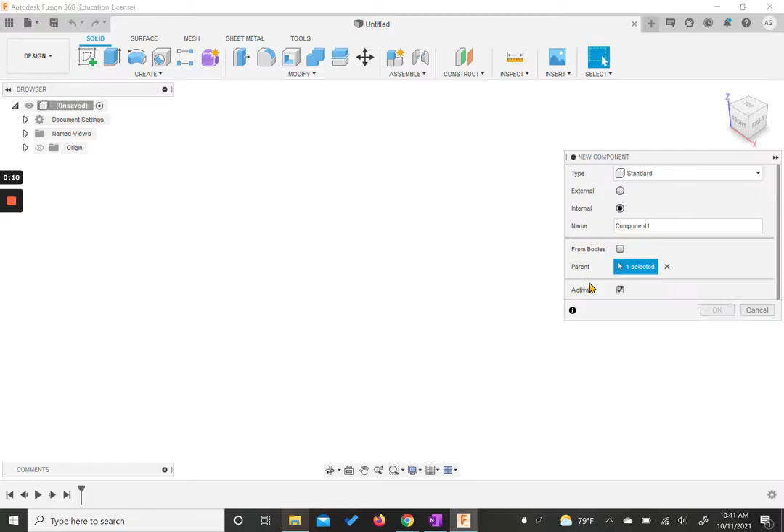First we're going to come and hit create and create our new component for this shape. We'll hit OK, then start a new sketch, and I'm going to start mine on our XY plane, this top plane, just so that it makes it easier for us to see what we're going to do next.

I do actually need to make this into inches for this shape. So remember, we need to come to our document settings, open the little folder, hover over it with your cursor, and hit change active units, choose inches and hit OK.

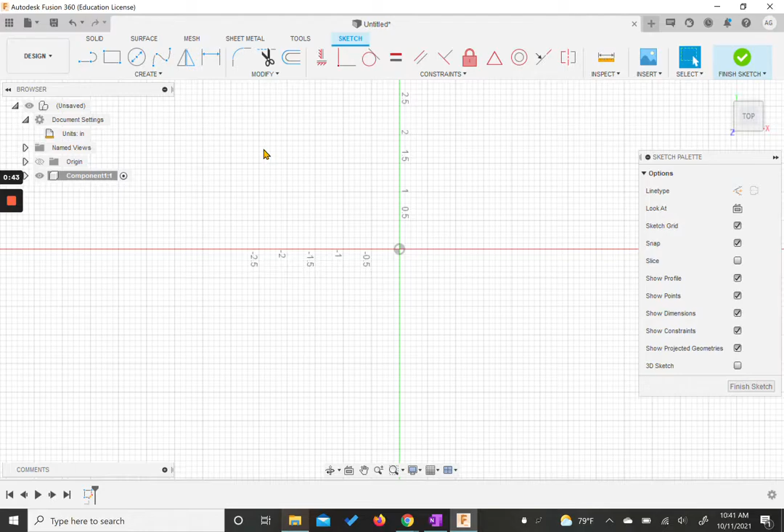Now in this sketch, we're going to create a circle. We're going to start it at the origin, right at the middle, and this is going to be 4 inches. So I'm just going to type 4 and hit enter. That's it for this sketch, so we're going to hit finish sketch over on the corner here.

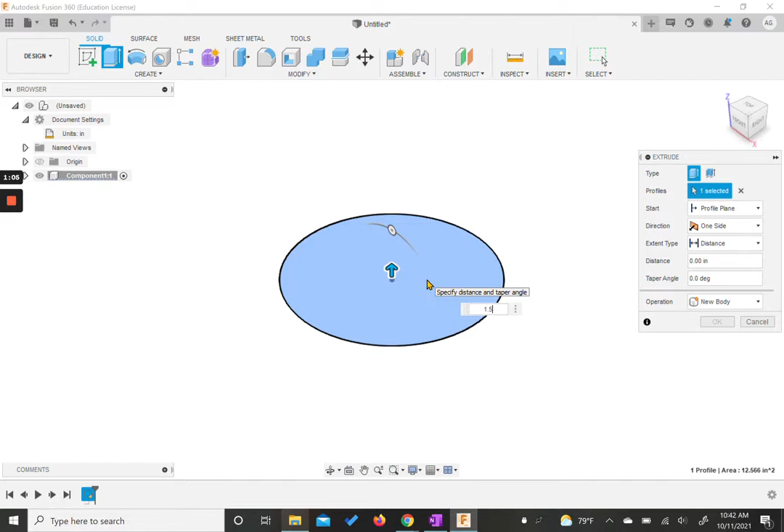We're going to extrude this to make a disc that is 1.5 inches tall. When you extrude it to 1.5 inches tall, we get this little disc. We're going to need to make a new sketch on this top surface.

So we're going to actually learn 2 tools today. What I'm going to do first, I'm going to go to the create panel, open it up, and choose the point tool. This creates a dot. So directly above our origin, I'm just going to click, and draw a point.

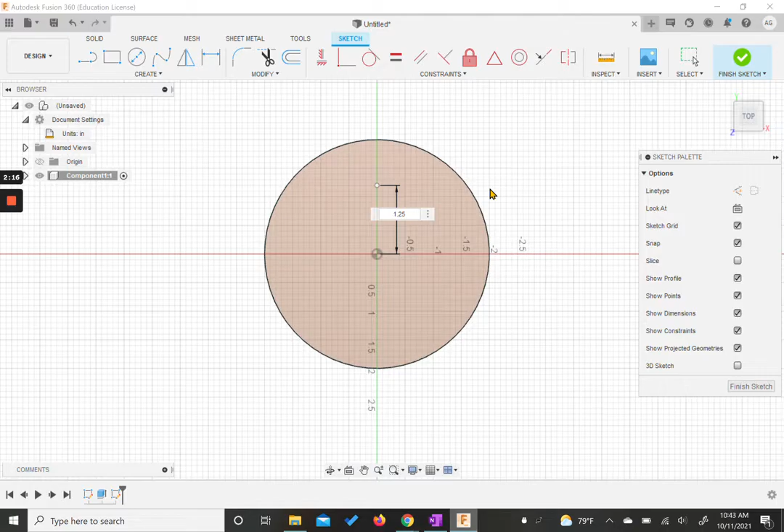I want to dimension this, so I'm going to hit the dimension tool, click the point, then click the center of our circle, and click to drop the measurement down. This is going to be 1.25, and I'm going to hit enter.

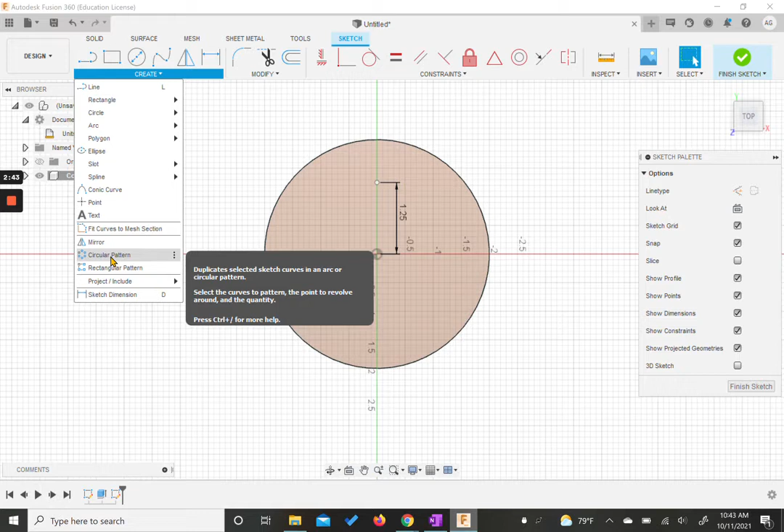But what would be a lot easier would be to come to the create panel and click this circular pattern. When you hit circle pattern, we can choose the object. The object is what you want more of, so we click on the dot. There it goes for the object.

And for our center point, we select that cursor, and that's going to be the middle of our circle. It's going to bring open this new panel that asks for the quantity. You can use the little arrows if you want, or you can type 5. So we need 5 here.

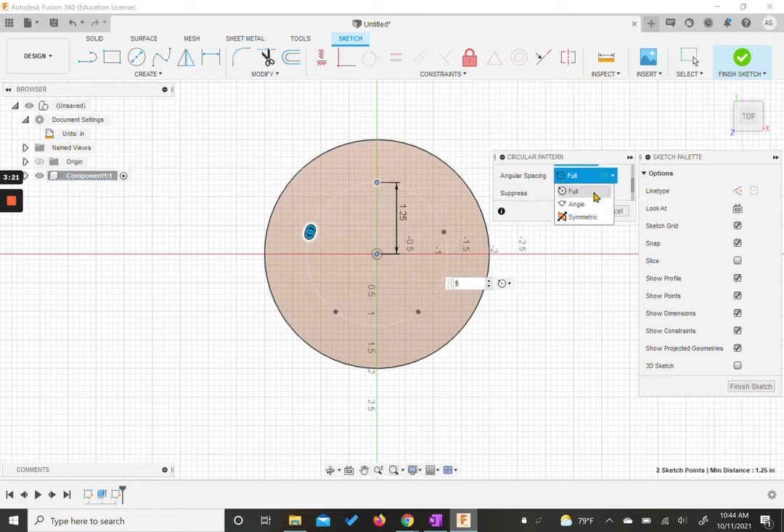If you wanted to change how far around it was going to go, we can change how many from that little arrow there, and we can also change the spacing if you wanted to. But for right now, we just need 5. We hit OK, and we now have 5 little dots. So we're going to finish our sketch.

Now we're going to start making holes with our hole tool. If you come up to our create panel here, there's the hole tool at the top usually. We're going to choose the hole tool. It asks to choose a sketch point, so I'm going to click on one of the first points that we have here. But now we need to know what type of hole we're going to do.

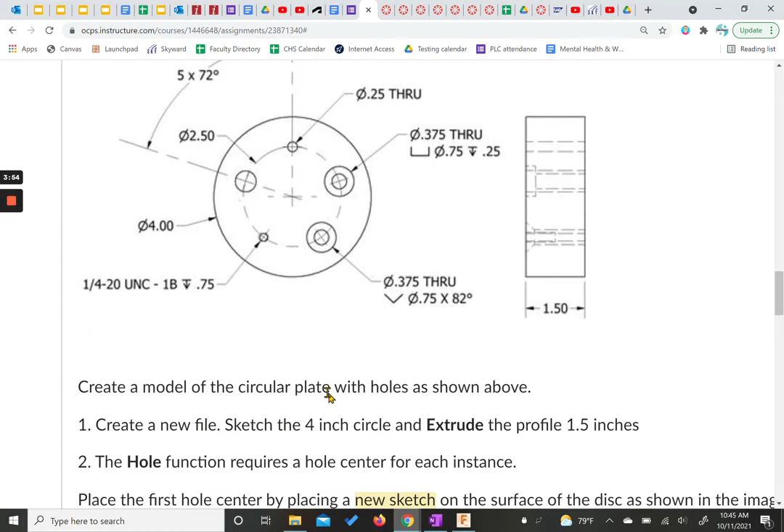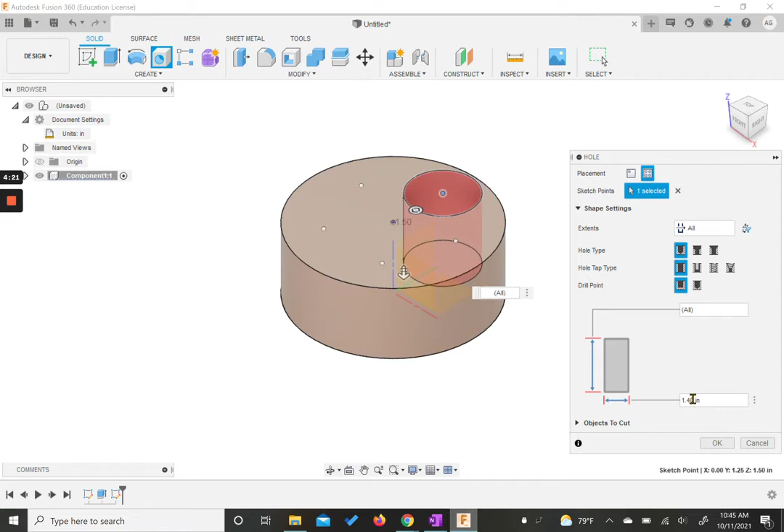If we come to our activity page, we have menus down here that show what your menu should look like. So we've chosen a hole, and we have these 3 chosen here. It's going to be a through hole, and it's going to be 0.25 inch diameter. So we're checking here - it needs to change from distance to through all. We have a flat point, and this is going to be 0.25 inch diameter. So that we can check, looks like this.

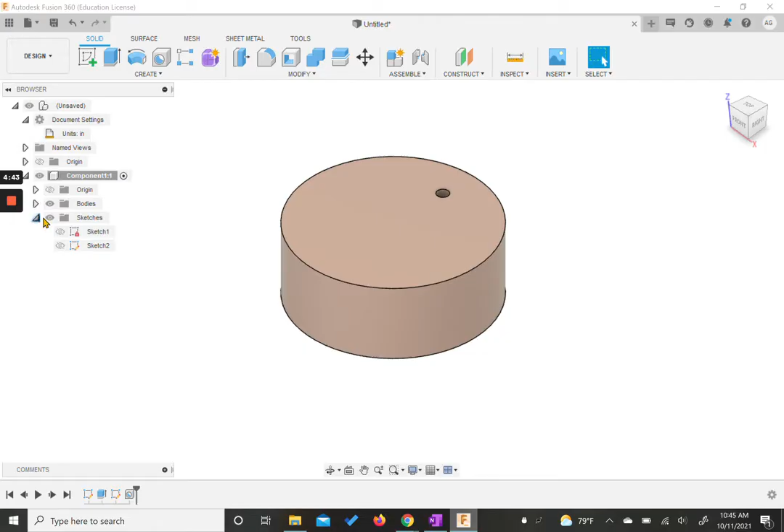All right, we can hit OK. And if you notice, our sketch disappears. So we need to come over here and open our arrow for component, open our arrow for sketches, and then we can toggle visibility for our sketch by clicking the eyeball icon.

So now we can still see our points. We're going to click the hole tool again, click on the next dot, and look at our guidance. We have a counter bore that's through all. We still have the same two left over here. In our values, we have our counter bore diameter of 0.75, our depth of 0.25, and our overall inner diameter of 0.375. So I come over here, we choose all, we choose counter bore.

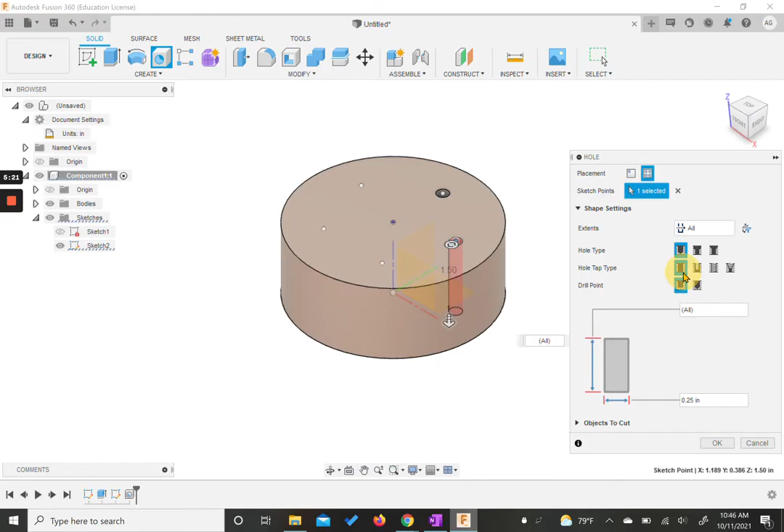If you hover your cursor over it, it'll name it for you so you can see them. We're going to come here, and this was 0.75. This was 0.25. And this one was 0.375. So again, we're going through and just matching the values in the fields here to what you have here. And we hit OK.

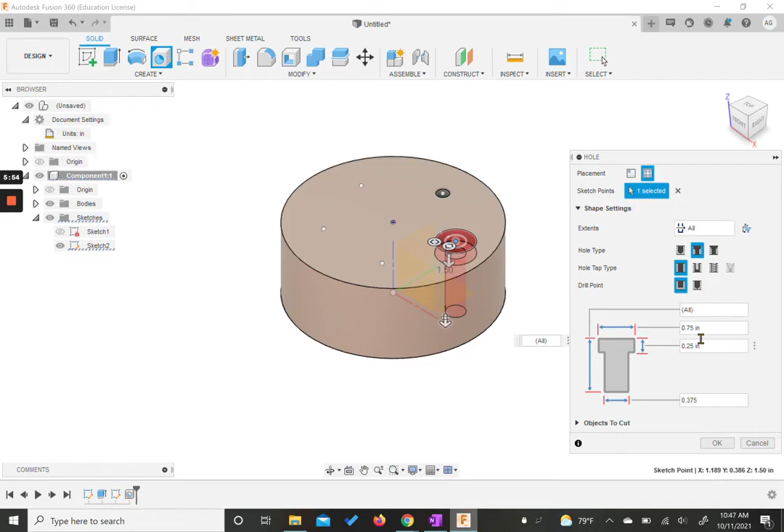Now this one looks just like that. Now if we scroll down, we have the next one, a countersink. That's the last one in this first option. So we have all, countersink, and then we have our values: 0.75, 82, 0.375. So we'll come here.

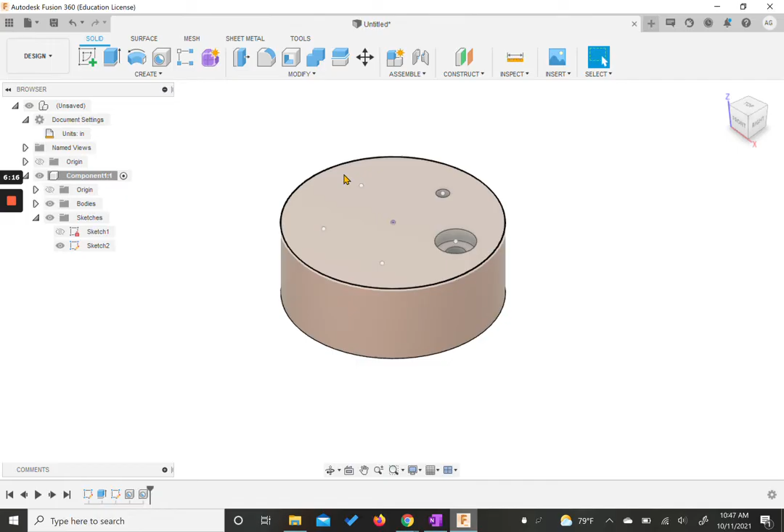Notice our dot stayed this time since we already changed visibility. We hit the hole tool, we choose our dot, we come over here and choose all, we choose countersink, and then we change our values. So this top one will be 0.75. We had 82 degrees, and then 0.375 at the bottom. And so this one's done.

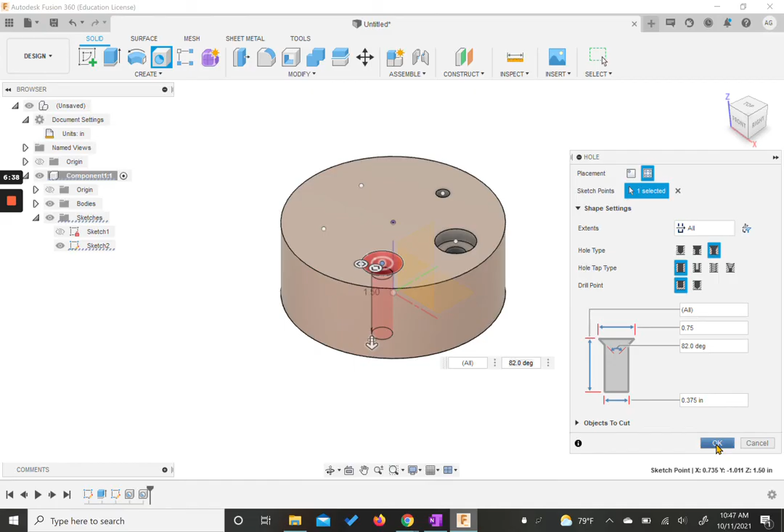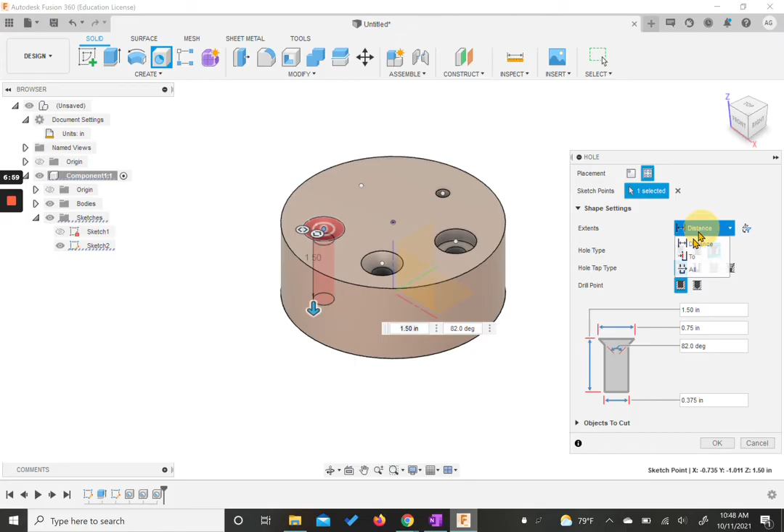We hit OK. Now we just have two more. If we go back, we have a tapped hole. So here we have all, we have the first option, we have the third option, so tapped. We'll keep the first two, and then we have a couple things to do down here. If we come over here, we hit our hole tool, we choose our dot, we come back to all, our simple, this first option, our third, which is tapped.

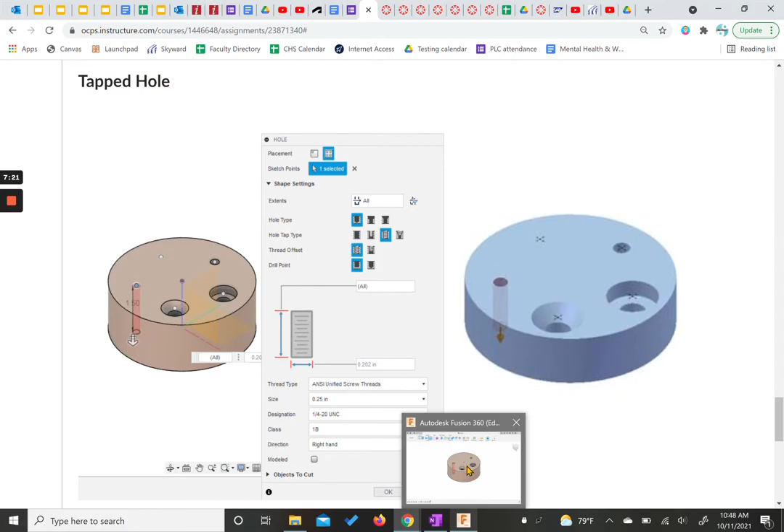And now this is where we need to double check the rest of this menu. If we come back to see what it should look like, it says ANSI unified screw threads, 0.25, 1/4-20 UNC. So that's the thread identification. We have ANSI unified screw threads, that's good. We need to open this and put 0.25. And then it should change.

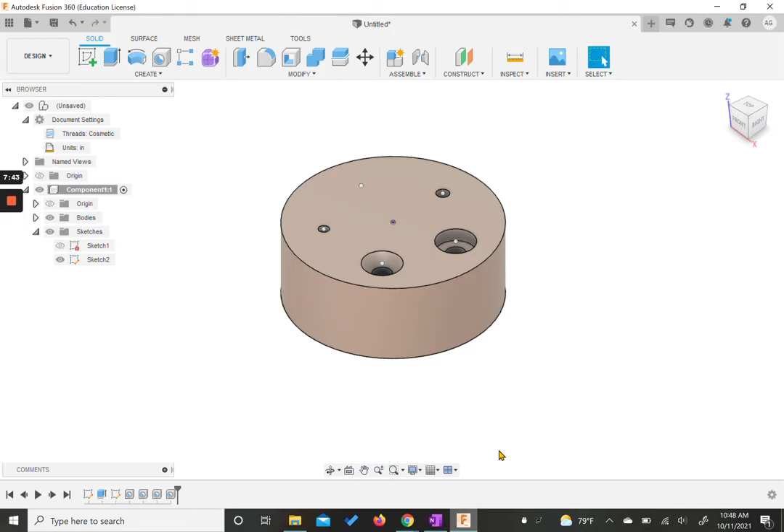Default is 1/4-20 UNC. Okay, this should be 2B right hand. We can double check, it says 2B right hand. So we're good to hit OK. This one has little threads, if you can see.

All right, and our last one, we have our clearance hole. If we come into here, we'll see our final one. We have our first, it's a simple. We have the second option, which is clearance. And then we have to change what it asks for in the menu. I've deleted or drawn out what's the measurement here, since that's added based on what you put in the menu.

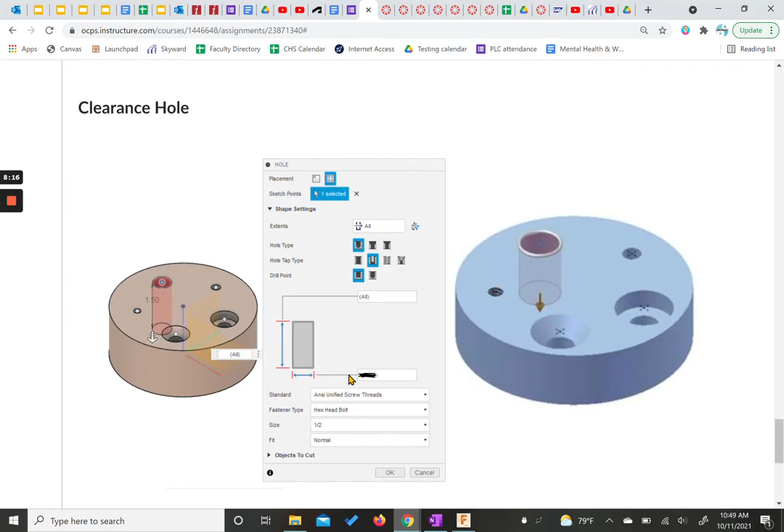Okay, so we come back to Fusion. We choose hole, we choose our last point. We come back to our menu, we choose all because we want it to go through the whole thing. We have simple, we choose our clearance, the second one. We come down here, again we're not paying attention to the number. We need to make sure these four things match what we have for our main menu: ANSI unified screw threads, hex head bolt, 1/2 inch, normal.

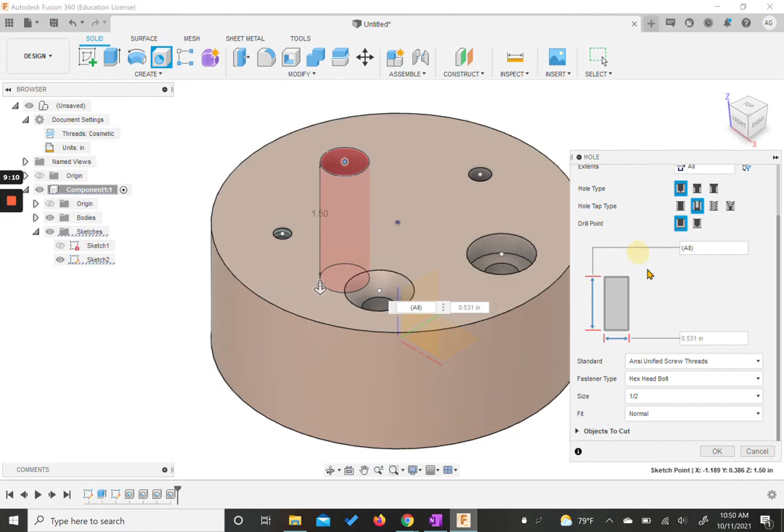Okay, so we come back here. We need to change it to ANSI unified screw threads. We come in here, it said hex head bolt, okay we can double check. It has to be a 1/2 and then normal. So this right now says 1/4, so we need to come up here and change it to 1/2 and stay normal, and hit OK.

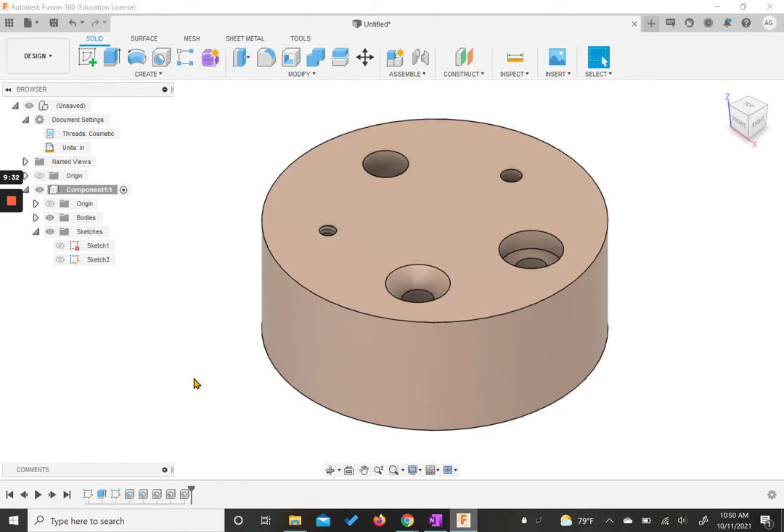So we'll talk a little bit more about what each of these holes are for at a different time together, but this is how you create them in Fusion. If you want to hide your sketch that has these points, come back into your browser and change the visibility. And that's it. Make sure to save your work.